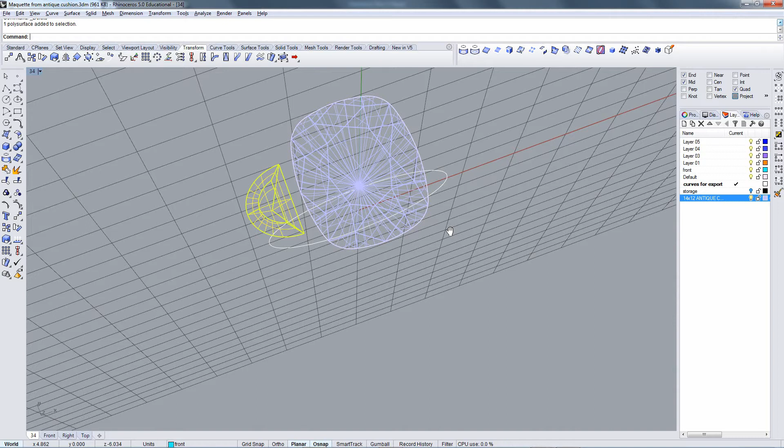I've got some commercial size stones here. I've got an antique cushion, 14 by 12, and I've got a half moon that is 6 by 3.75. Both of these are stones I can source easily. I'm working with a finger bore of 17 millimeters, which is a standard industry finger bore.

First thing I'm going to do is offset that 2 millimeters, which is a good standard shank thickness. I'm going to move it up 0.3 millimeters so that it's narrower at the bottom than at the top. You don't want to go below 1.7 normally down here, because after casting and finishing it's going to come down to close to 1.5. If you're really feeling adventurous, take it at 0.35.

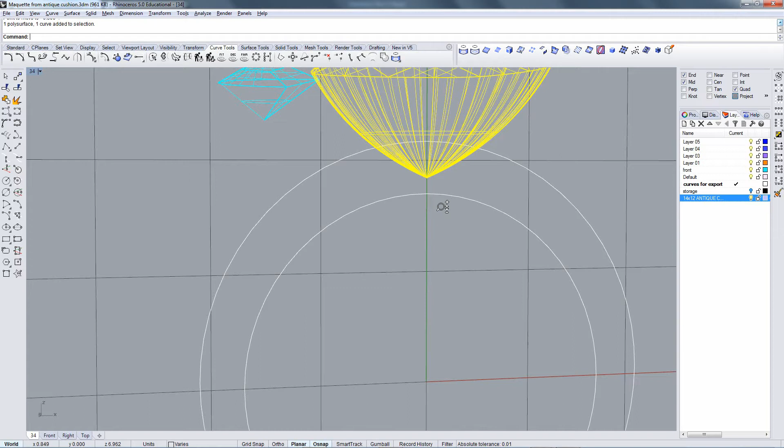Okay, so you have this. We now need to line the center stone up, so that we already have actually. We want that to be between 6 and 7/10 of a millimeter off the finger. So put it on the finger, and there you go.

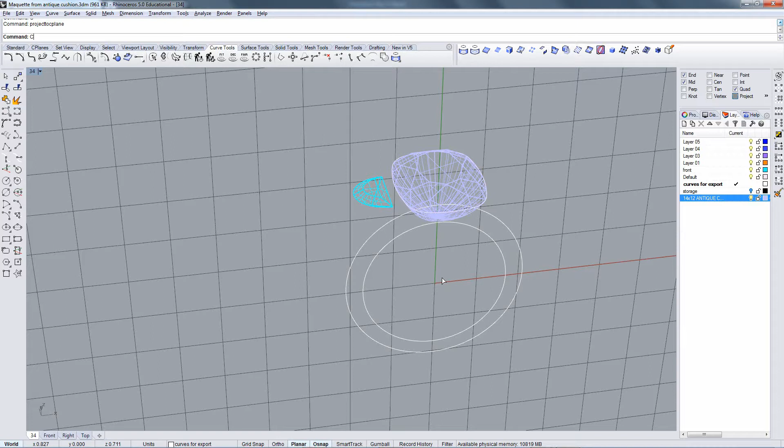Going back into top C-plane, you will see that I do that. I work in perspective view. I change C-planes all the time by keyboard shortcut. So if I hit right C-plane, it's like working in the right view. Front C-plane is like working in the front view. And you can find that by going to set C-plane and then doing it here.

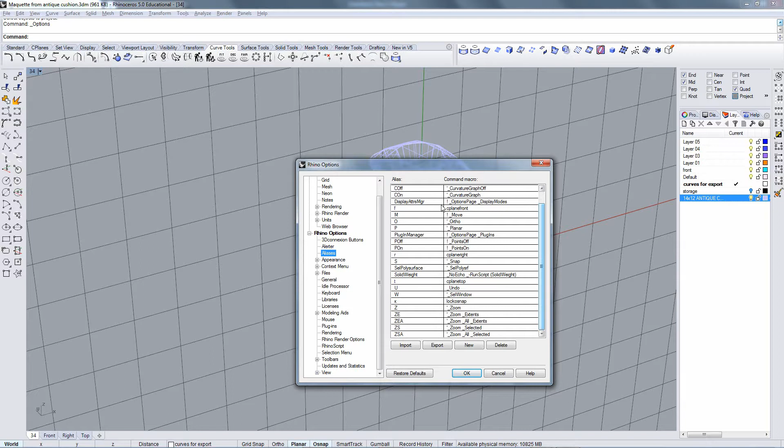But it's much easier to set a shortcut for it. The place that you do that is you come to Options, Keyboard, it's either aliases or keyboard, I always forget which one. Aliases. So go to aliases, and for me, I just use the first letter of the word: T for C-plane top, that's the actual command in Rhino. R for C-plane right, actual command in Rhino. And F for C-plane front. That way I can just type T, F, R to get my 3 standard C-planes up.

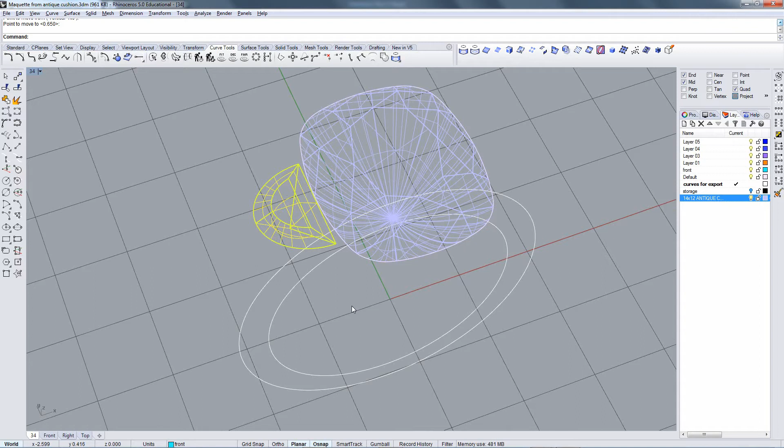So when I change C-planes, that's what's going on. The first thing I got to do is set this up to make sure that it is tucked under the center stone. I'll start with a very minimal tucking under. I'll go ahead and mirror this with history. And then the next question is elevation.

Now I did bow or swell the sides of the stone to represent what a colored stone would be more likely to look like. Usually there's a couple of ways to do this. I'll do it with curves. No, I won't, I lied to you. I'm going to use a cutting plane, because I can take a cutting plane command.

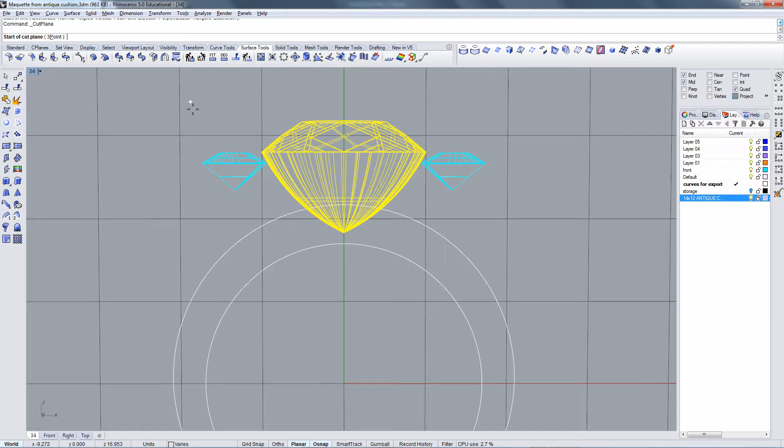I can click literally anywhere and pull it to either side holding the Shift key down, and Rhino will give me a surface that intersects, that covers the full dimensions of that object. Because I'm trying to visualize where I want my under bezel to be, it's going to be helpful to me if I have a surface that'll actually cut off my stone.

Usually you want it between 1/3 and 1/4 of the way. So I did go into my front viewport for just a minute. So 1/3 would be about there, that would be the top edge of the under bezel. That's as low as I can go. I want to look at some relationships here. I don't want to go quite that low. As high as I could go would be 1/4, which would be here. I'm going to come somewhere in between.

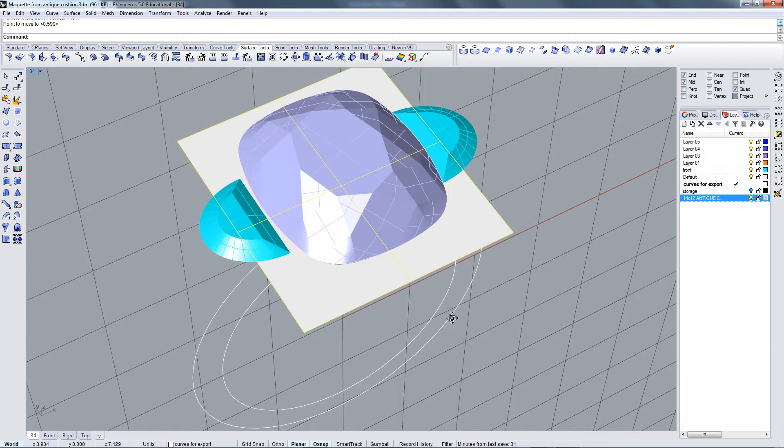Okay, so that's going to give me the elevation for my under bezel for my center stone. That's important because it's also going to impact where those under bezels take place on the side stones. As we mentioned in class, we want those to work together.

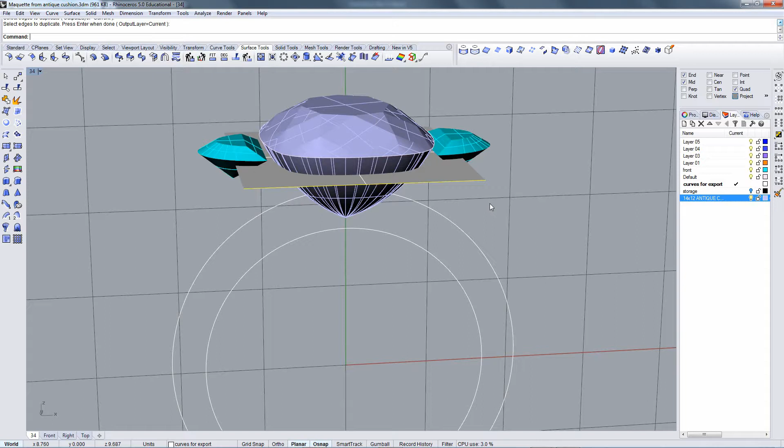Now that I have this, I don't necessarily need to have a surface anymore. So I'm just going to borrow the front edge of this and project it to CPlane. And I can throw that away. That's a quick way of getting myself a curve there. Now, as far as the under bezels for my side stones, I would like them to be contiguous with that. So I'm going to use near snap.

I can't come right up against the side of this. I need to leave a little bit of metal there, about 1 millimeter. It'd be useful to me to be able to see what that millimeter looks like.

Going to use near snap, grab that curve, do both sides line, and I'll pull myself a reference curve, which I will then offset maybe 1 millimeter. See, that's going to be way too much. The outer edge of this can't break beyond the girdle

of the stone. So I'm going to use an end snap so I can grab right at the corner here and pull it down. I don't want that corner to take place where this hinges any farther out than that. So for now, I'll put it right there.

Intersect, snap. And I'm going to pull a line that follows fairly nicely with that shoulder.

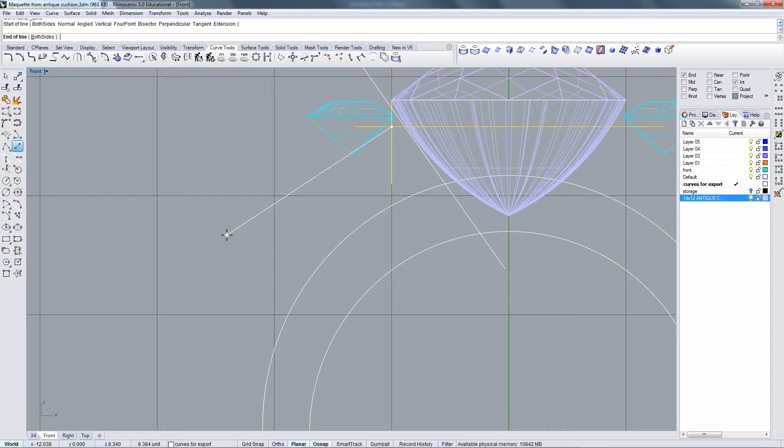The more upright I take that stone, the more flat, the bigger it's going to be, but the duller the fire is going to be, and the clunkier it's going to be as an object. Tapering it down makes the center stone much more important, but it makes the side stones almost disappear, and it really dictates the flow of the shoulder.

So I'm just going to try and go pretty much parallel visually to what that is there.

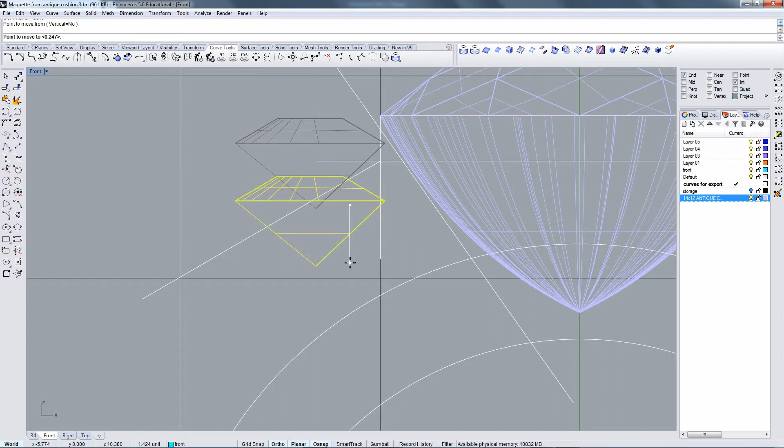I'm going to go ahead and move this stone down straight, holding the Shift key. And I'm going to picture basically where it hits the middle of the girdle of that stone. And then I'm going to rotate it.

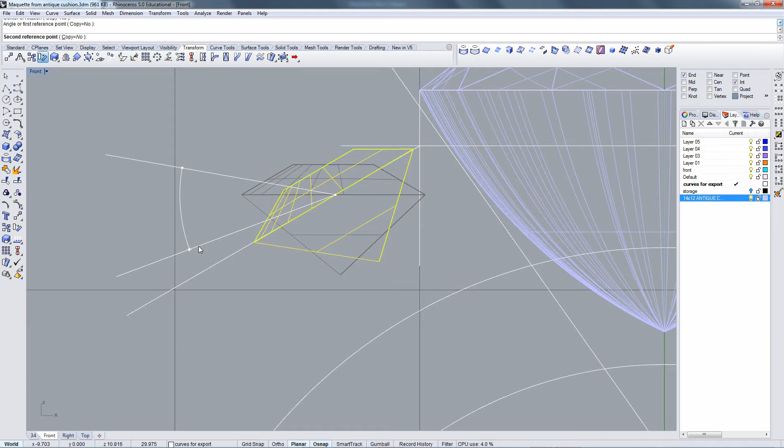And I don't like to use the gumball. That's a personal preference of mine. You can if you want to. But for me, I prefer to just come in here, grab pretty much anywhere. I'm going to rotate the stone until it seems to line up pretty well with that curve.

And then I'll move it back up. And once again, I want that line, that's going to be the top of the under bezel. I want it to be somewhere between 1/4 and 1/3.

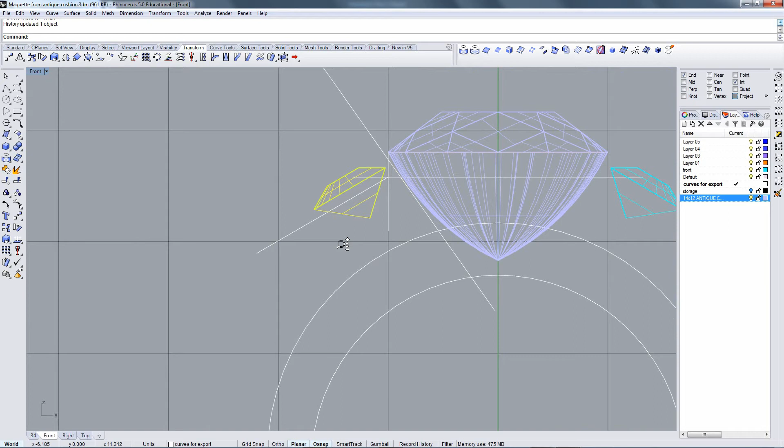That's okay, and I can actually have this snug up a little bit tighter under that stone. I have to, because actually it can't be outside of the girdle. So tuck it back under.

And you can see that if I tuck this under and I keep that angle, where this corner meets starts to become somewhat of an issue.

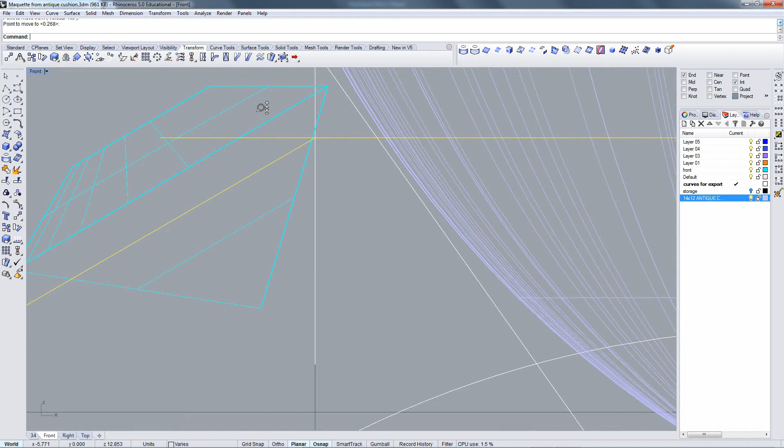Going to alleviate that in 2 ways. Going to drop the whole under bezel assembly down a little bit. And then I'm going to move the seam over a little bit.

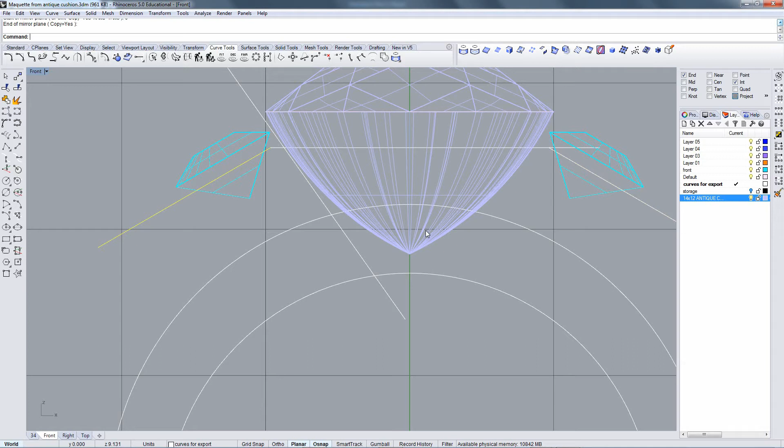And that'll give me a nice indication of where my under bezel could be. I might leave that curve, that could be useful later. So there.

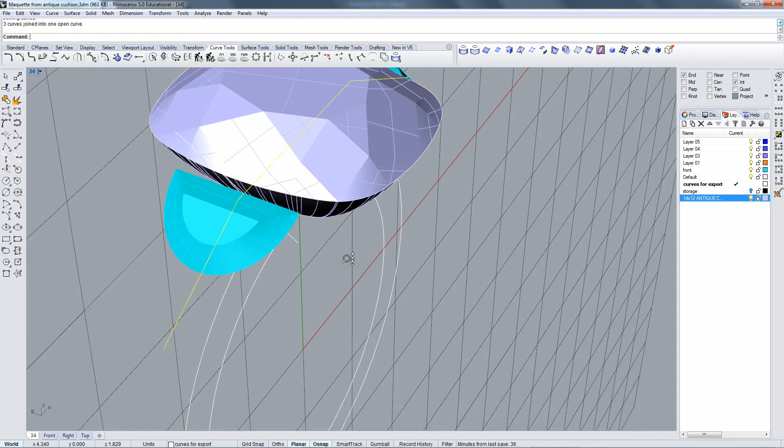I'm going to join those three together, and I'm going to extrude them straight out. Remember, extrusions are always perpendicular to the active C-plane, so to get it to extrude like so, I need the front C-plane active, which it is. Give myself plenty of room, I don't want to cut this close at all.

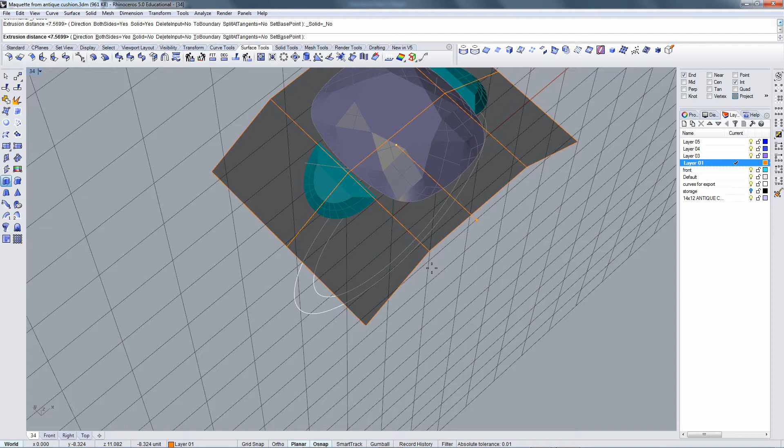So now that I have that in place, I can start to get a better sense of how that looks, and I think it's okay. I may move things around a little bit more later, but I think it's okay.

I would like to bring, I have a girdle curve here for the stone. I would like to bring that down onto this level. So I'm going to set a C-plane to this surface, and I'm going to project this curve down to the C-plane.

I will be honest with you, where project to the C-plane is, I do not know. I've been using it as a, you can type it into the command line. I have it set to the C keyboard shortcut because I use it all the time.

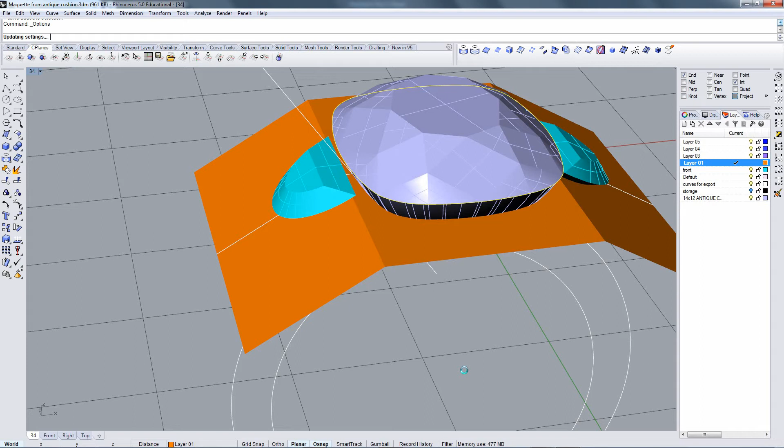I'm going to hit the no option, keep it there because I don't want to lose my original. That curve gives me an idea of what that looks like in three-dimensional space.

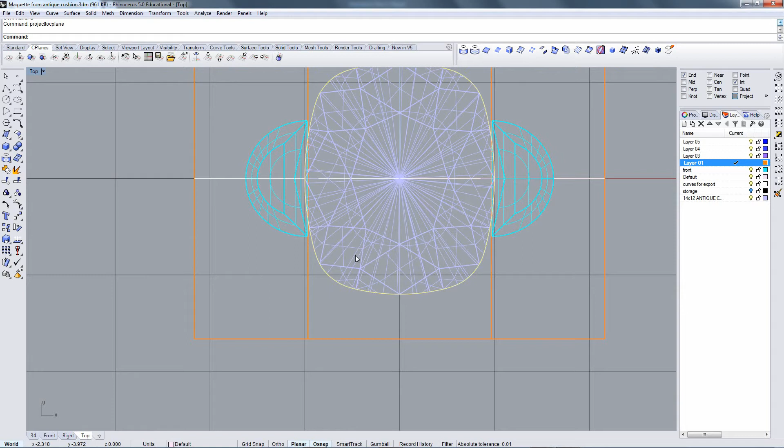I can't have the under bezel any bigger than that because that's the girdle. If I go into the top view, that is the girdle. I need it actually to be smaller than that. Not much, doesn't have to be a lot smaller, but it needs to be smaller.

I think that's realistic.

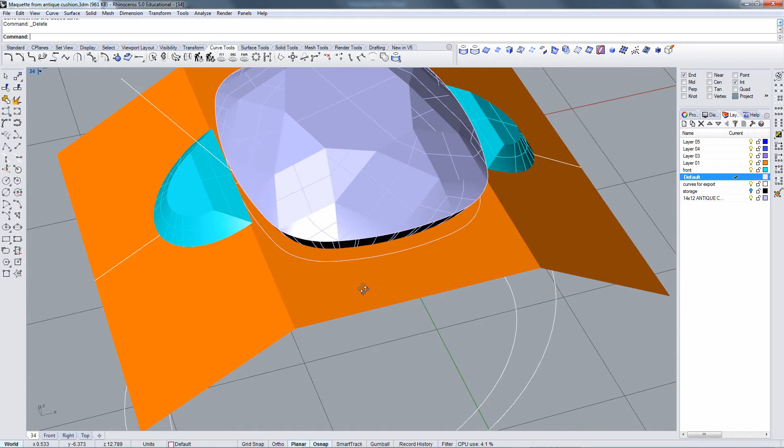Okay, I'm going to do the same thing with these stones. I don't have a pre-existing girdle curve, so I'll just make one by duplicating the border and joining those curves together.

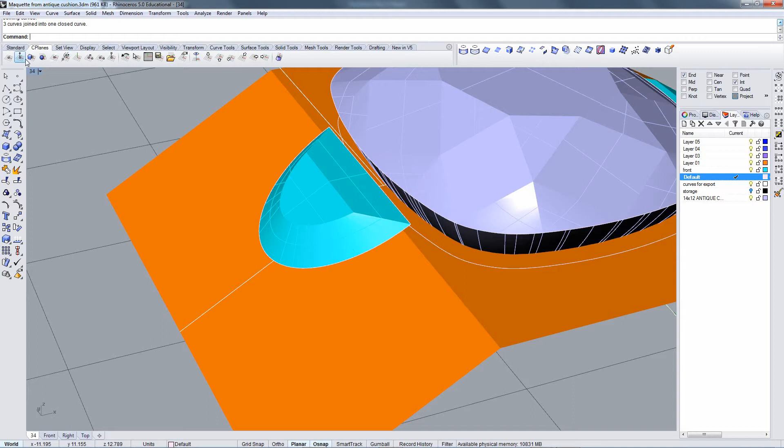And then it's the same situation. I need to set a C-plane to this surface, and that'll allow me to project this curve onto that C-plane, and then I'll be able to offset that curve just a little bit.

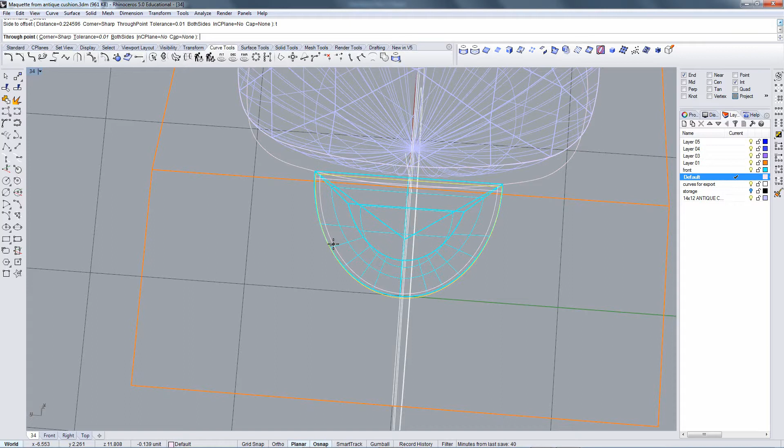I'll probably offset that a little bit less. We shall see. And then I can delete that.

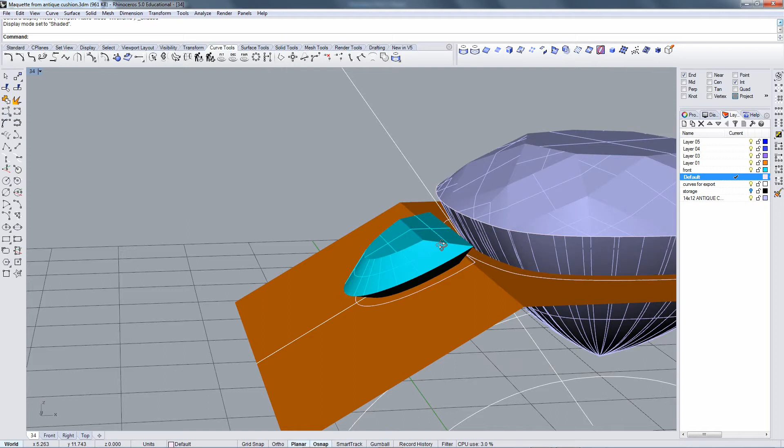And this begins to give me some sense of what I'm going to be dealing with in my plate. If I hide my stones, turn off their layers, I can start to see what's going on here.

So I'm going to put the C-plane back on top of this surface. I'm going to draw a straight line with project to C-plane turned on my snaps. I'm going to grab the end of this and pull.

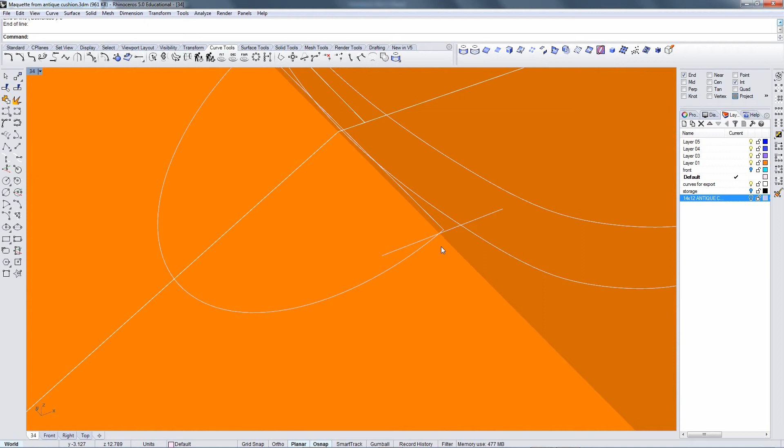Because I need to have this come up and meet this center line in some way, and there are a couple of ways I can achieve that. And I need to decide how I want to achieve that.

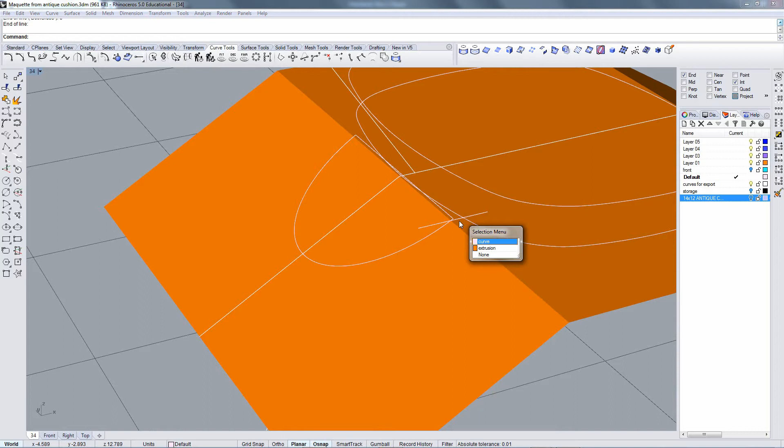But frankly, for a maquette, you know what? I'm overthinking this. It's like I'm modeling it. I'm not going to go that far. I am going to declare that this is okay. All right, so I've got this.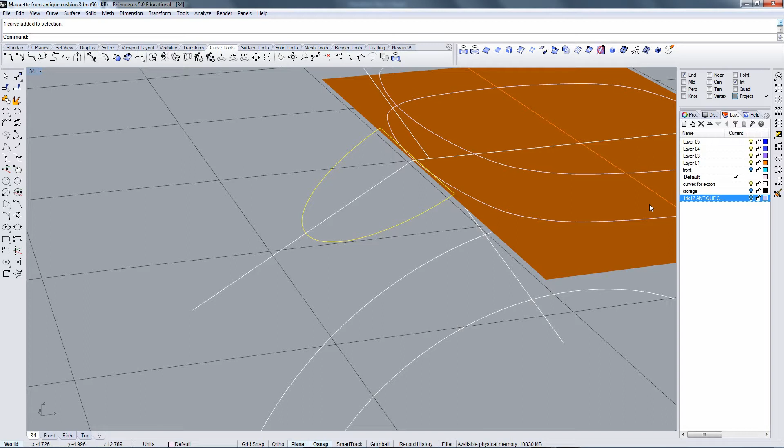I'm going to take off this surface. Extract copy equals no by right-clicking on explode. And I'll replace it with a planar surface, like so. I'll go ahead and trim that center surface.

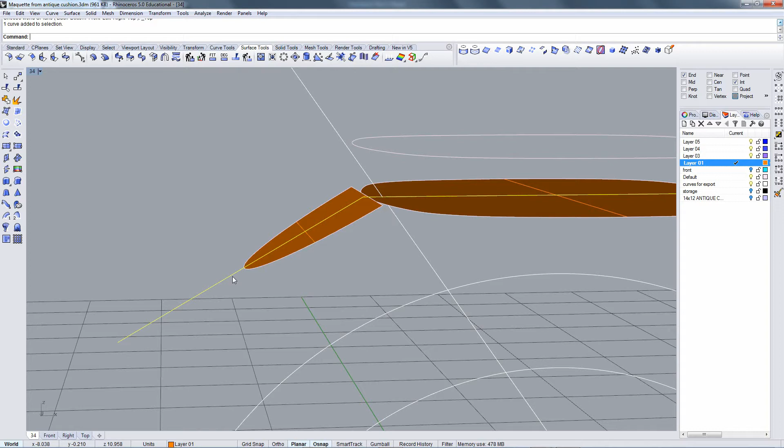And then I'm going to offset this surface the thickness that I think I want for my under bezel. Now there's a couple of ways I can do that. I could come here in the front view, turn my stones back on, and do an offset so I can visualize it. Through point,

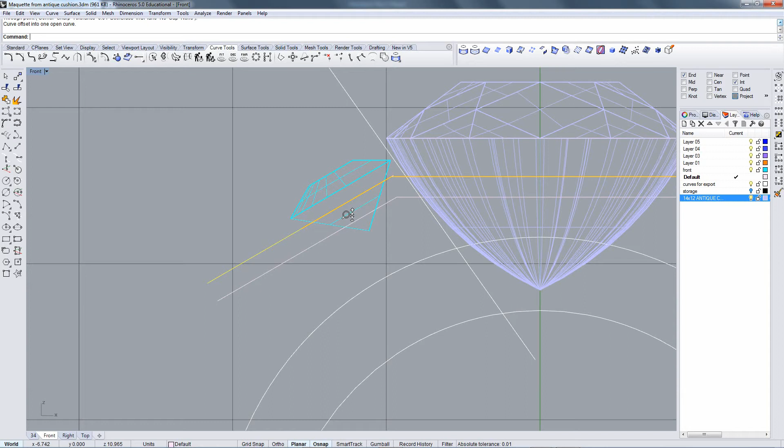and just rubber band it until I see something that I think looks good for the overall scale of this ring. Say there, okay? And then I can repeat the command and look and see what that was. That was 0.65. It's got to be heavier than that.

I can't have an under bezel that's smaller than 9/10. So let's see what 9/10 looks like. Okay, it's going to be heavier. I want it to be heavy. So I'll go with a 1 millimeter.

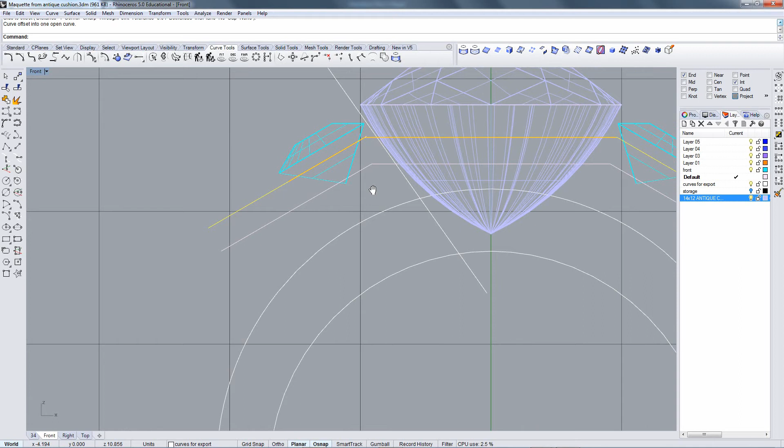Nope, too heavy, 0.95. And this is a design process. I'm looking at it. Now that I've got that distance, I can come back here, grab this surface, and I have a couple of choices.

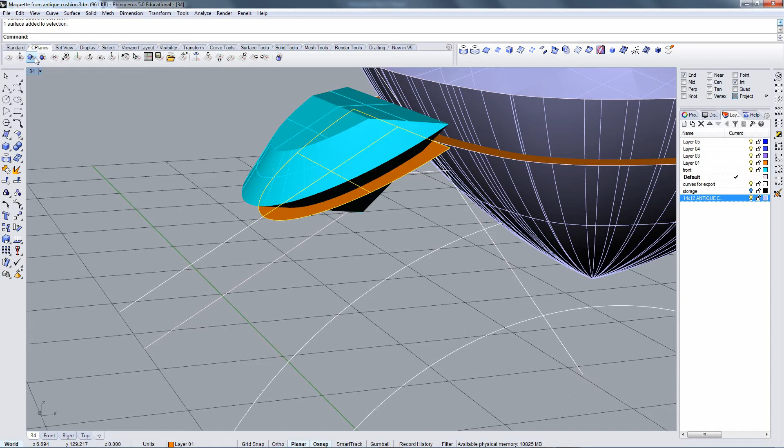I can offset surface or I can extrude it. To extrude it, I would once again set the C-plane to that surface because extrusions are always perpendicular to the C-plane. Go to solid, extrude surface straight, and I would extrude it minus 0.95.

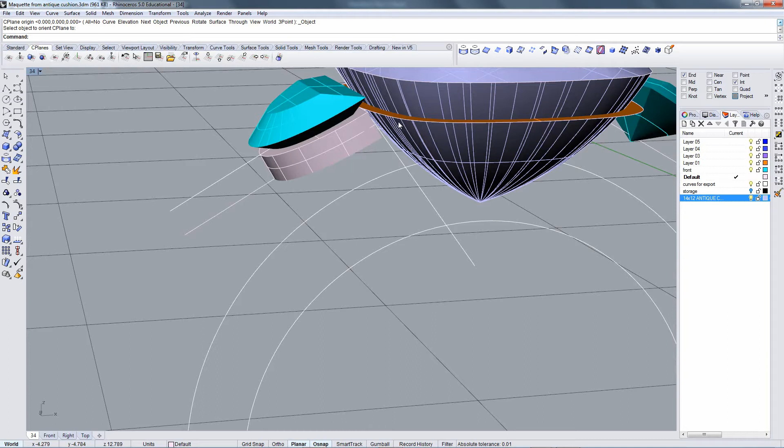Now it's going to leave that original surface behind, which I can now delete. I can do the same thing for the center. Set a C-plane here, and extrude straight, and the same distance.

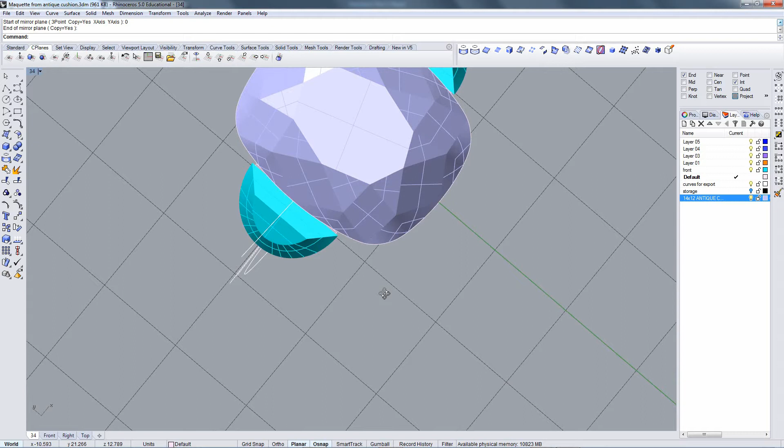And mirror that over, and that'll give me an idea of what I'm looking at for a potential under bezel for this piece.

My next question is going to be, how does that relate, going back to my top C-plane. Whenever I'm not modeling, I drop it back to top C-plane because that's the standard view.

Now that I see it, those might be too thin. But I'm not going to worry about that. It was just to give me an idea. I won't be using them anyway, to be honest with you.

So I'm going to go into my front C-plane. I'm going to now draw the front of this a little bit. Going to take a line.

And I want it to come inward. Now remember, if you look at the samples we gave you, you can have that come anywhere from into the center to like this. It can be anything you want. Generally, I like to aim somewhere halfway between the girdle, between the apex of the finger bore and the center of the bore. So I usually come somewhere like that.

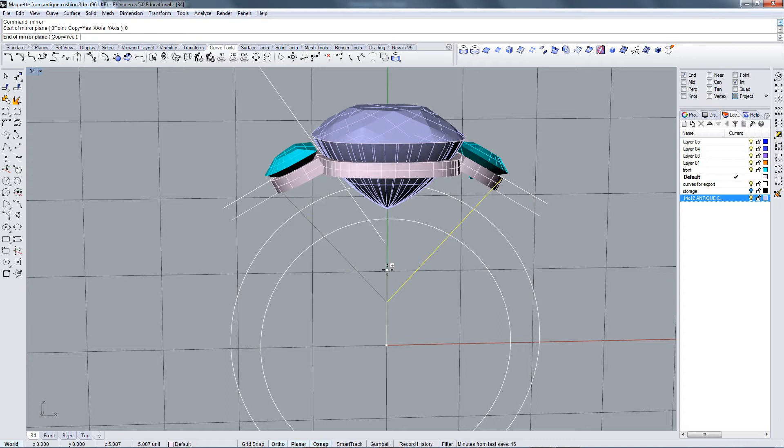Maybe a little lower, depends on how wide the head is. I'm going to splay that out just so I can get a sense of whether I like that or not. I do. That's going to be fine.

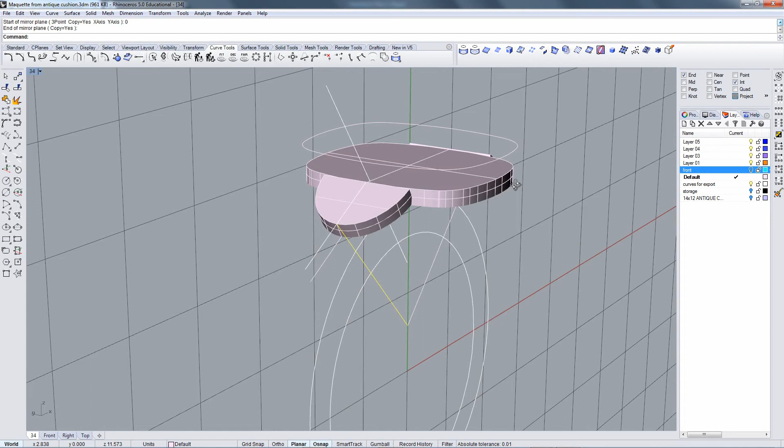So now I do run into a little bit of a challenge, because what I would like to do is just extrude that straight down and have it be what I want. That would be the easiest way to maquette or model this.

So, I still have my curves here, right?

So what I want to do is right-click to extract a surface. This time I'll say copy, yes. I have it set to the orange layer, so it'll do the same thing, but with orange.

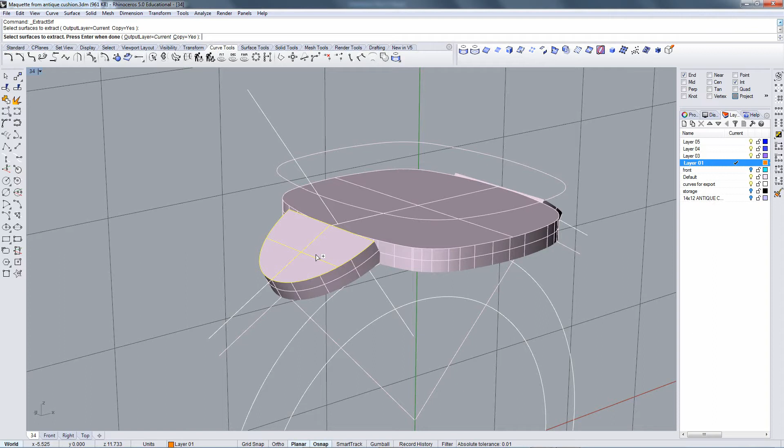Going to untrim, untrim all. I'm going to extend this surface till it intersects with that one. I'm going to use it to trim the top of that off, that way I know I have a really tight fit here.

In fact, just so I can see that, I might extract an iso curve, to catch the corner of it.

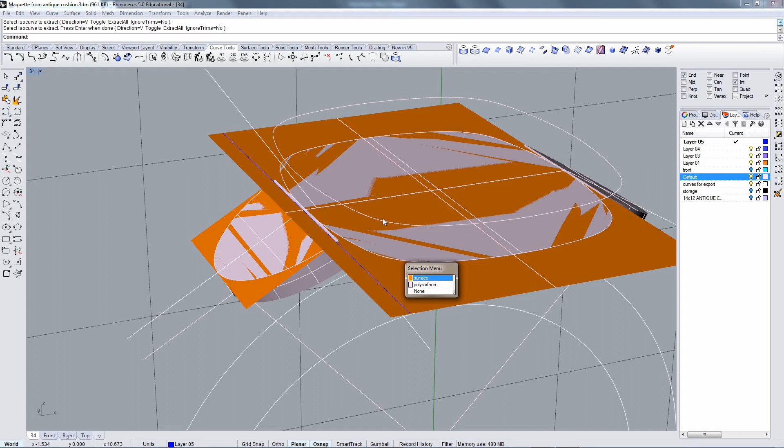I'm going to come back and look at my lines. It would be all kinds of wonderful if I still had the curve. There it is. I'm going to just change that to the blue so I can see it easier for a minute. Same with this, change layer to blue.

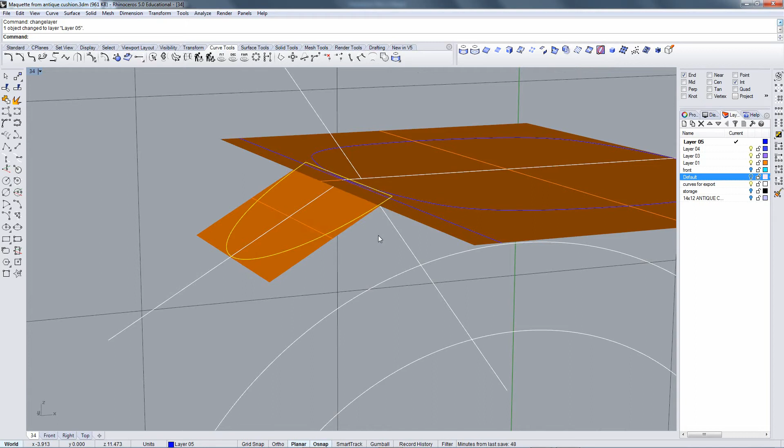Okay, so I know that this is going to work until here, and then it's not going to work. And I have a choice of what I can do with this, but what I think would be the most graceful thing to do, I'll go ahead and use that extract iso curve command again. T to toggle direction, intersect, snap to take it right here.

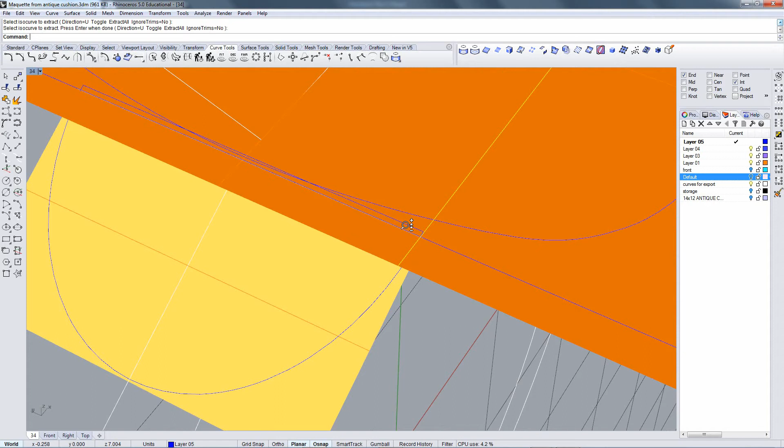Okay, I'm going to offset that. I need to be on the right C-plane to do that, so I'll set my C-plane. Top C-plane would have worked, but I may as well set it to the surface I'm working on.

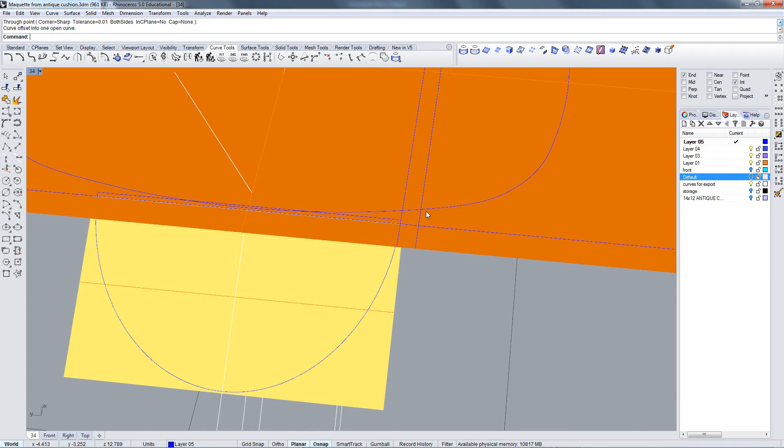I want to be able to blend these two together in a pretty way. So I'm going to come out, I think, that far. Mirror it over.

And I'm going to use that to trim. I might want this curve back at some point in time. Copy, paste, hide. Just so if I want that curve untrimmed in the future, I can find it.

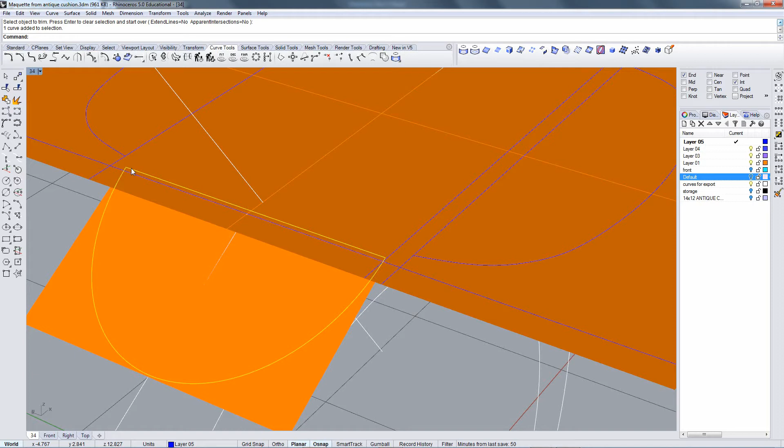So I've got that. I'm going to use this curve and trim off the back side. I also might want this someday, so hide. I can trim the back of those curves off with the surface, or I can trim it off with a curve. Doesn't matter, they're right here.

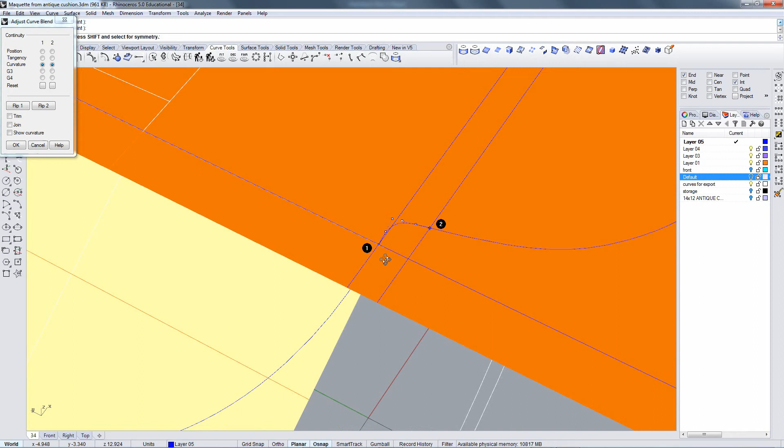Okay, and I'm going to do a blend curve. I always prefer the adjustable blend curves. It's going to give me a weird bump. I don't care. If I hold the shift key down while I drag on these control points,

I can get a symmetrical effect. I think that's nice, except for it's a bump. To make it not a bump, I can either project it onto the surface, set a C-plane, project to C-plane. It's a project either way. I'll project the surface, delete input, yes.

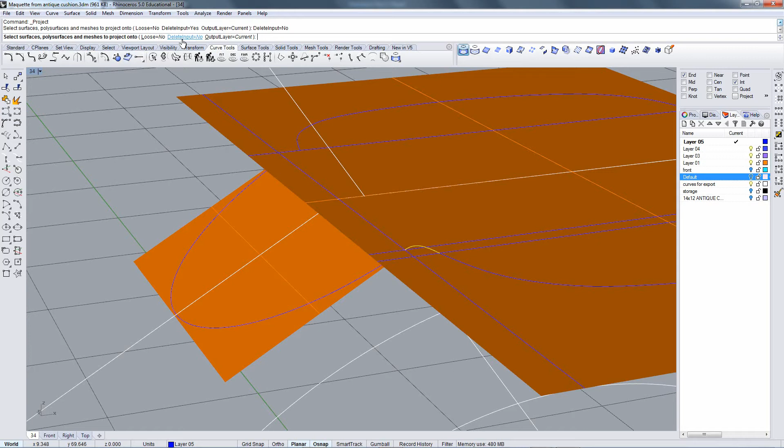There we go. Mirror it over. Mirror it over. Mirror this over.

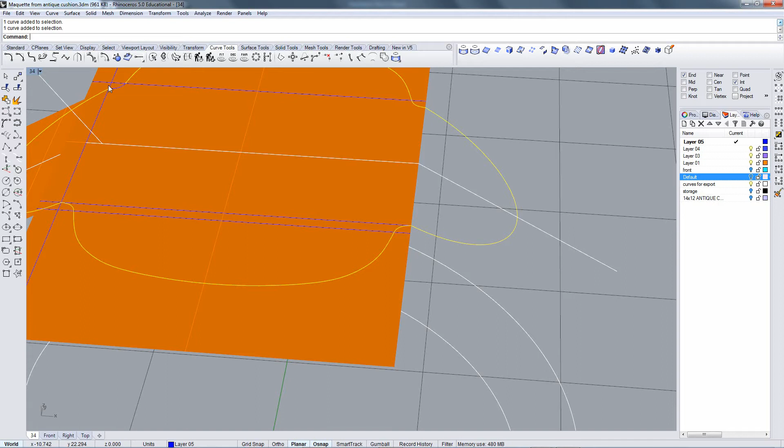And join them all together. That gives me a single curved element that I can now work with.

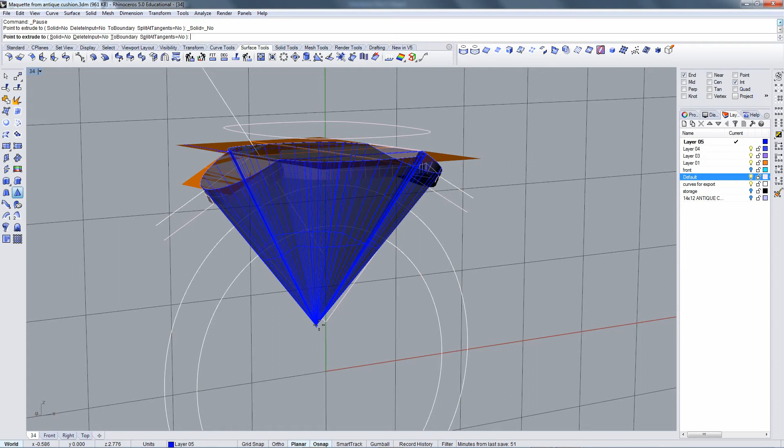I'm going to see what happens when I extrude those to a point. Frankly, that point. The main thing I want to see is how do I feel about what that's doing here at the bottom.

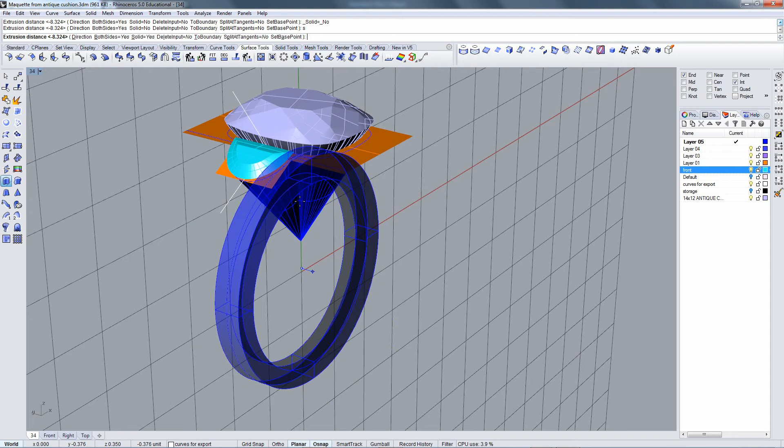And to see that more clearly, I'm going to go ahead and maquette my ring shank. It's a straight extrude, solid yes, 1 millimeter each side. Basic 2 millimeter shank. That may not be what I end up with in my design.

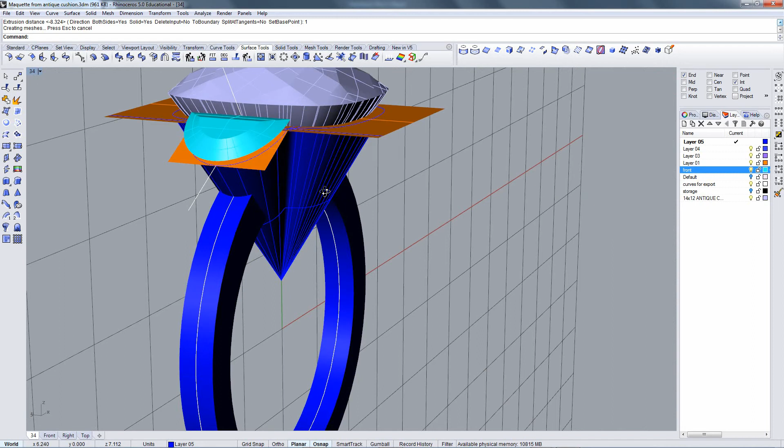But it does give me a good sense of what I'm looking at here. And the answer is not so much. I don't really love what's happening down here. So I would want to modify that some more.

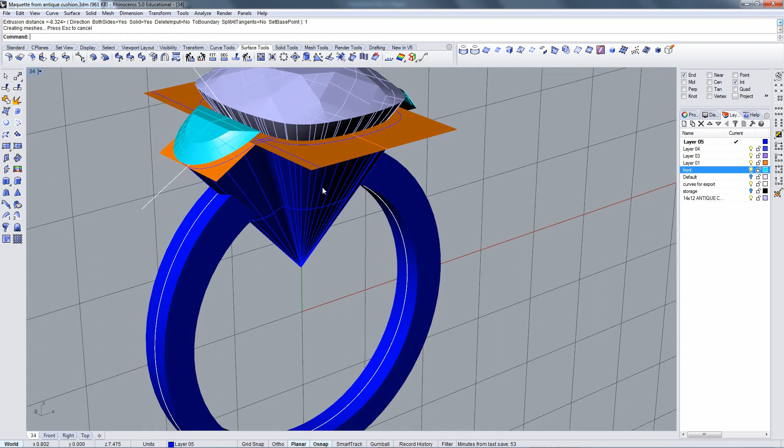And there are a couple of ways I can go about that. But I think that as a place to end, because this is going to be a long video if I don't, and that gives you some idea of how you can start thinking about maquetting this. Already you can see how that head section is looking.

I can grab that, extrude it out, and either trim it or just leave it so I visualize. Either one will work. And that starts to give me a real sense of what's happening down in here.

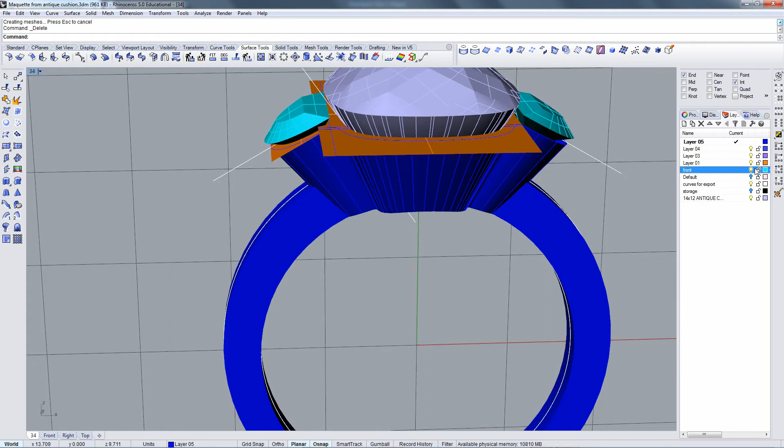I'll clean this up a little bit because it'll make it fun if I do. I'm going to take this curve that I have and do something a little destructive. I'm going to trim it, cut it in half.

Just for a minute. Trim. Oh, it won't cut it in half that way. What am I thinking? To cut it in half, I need a cutting plane.

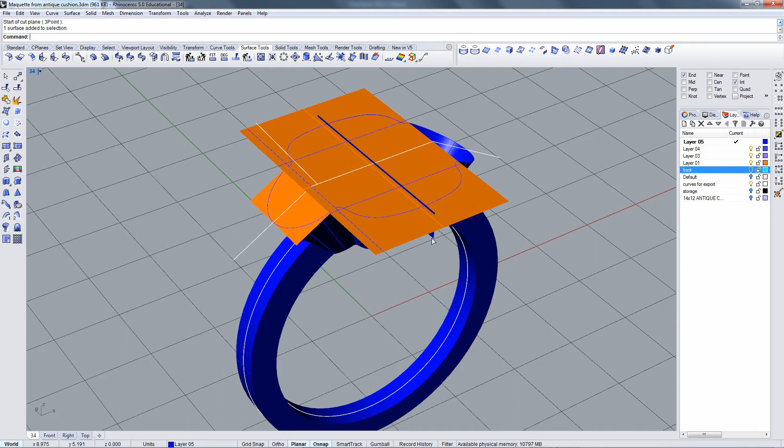Top C-plane, cutting plane at 0. Gives me a nice surface, but actually I want it going the other way. Once again, cutting plane at 0, going side to side. Now I can use that surface to cut this in half.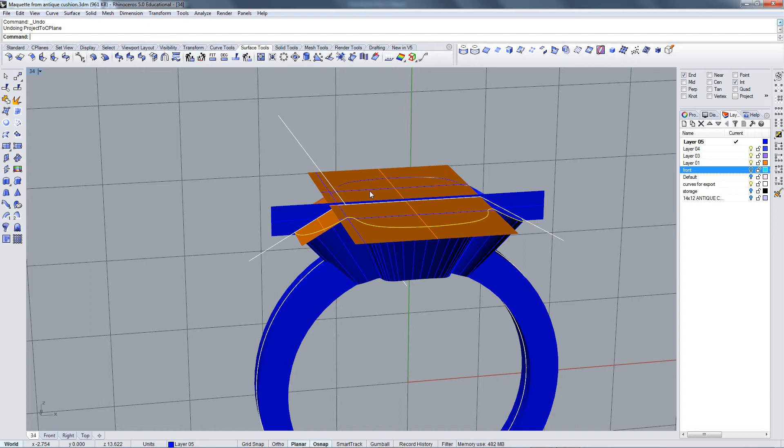Take this curve, front C-plane, project to C-plane, delete the original, copy to clipboard. That takes it out of Rhino. So I can undo without hurting anything, paste that back in, and now I have a nice curve that I can use to extrude straight.

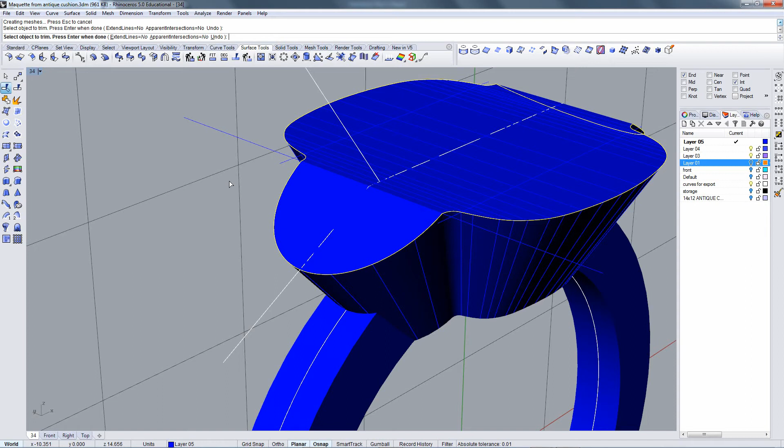I can take this curve and trim the rest of it off, which will allow me to close that up should I want to do so. More importantly, having done that gives me a curve to offset.

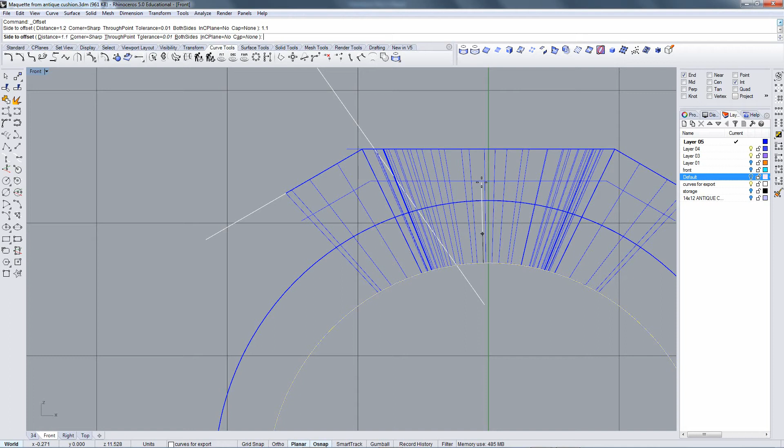I had realized that the 1 millimeter looked too thin to me. I'm going to go 1.2 because what I had here looked a little too delicate. Your typical finger rest is about 1 millimeter, can be thicker. I'm going to go 1.1... actually it could go as thin as .9, so what I'm going to do is go 1.

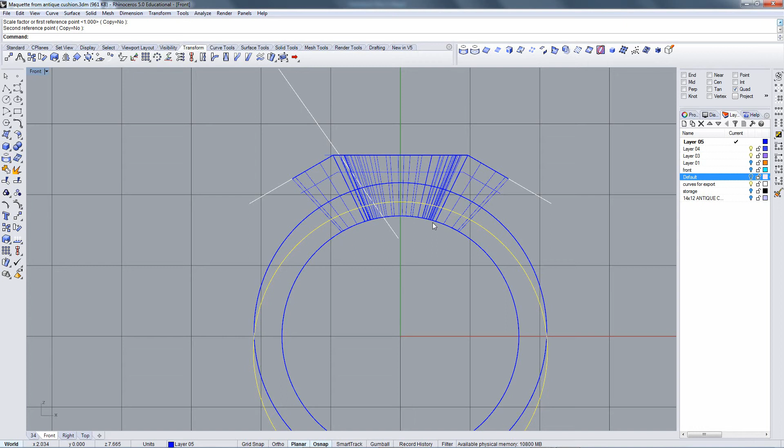And then I'm going to scale that curve up. The reason I'm doing it from its quad is so the finger rest can be narrower in the middle, thinner here, and a little thicker at the sides, because that's often structurally a nice thing to do. I'm doing a maquette so it doesn't matter a lot, but it doesn't take any extra effort, so why not?

So I have this. Probably the easiest thing — and I've been drawing all this in blue, which is really dumb because I can't see it if I change my colors. I'll put it on any other layer, doesn't matter.

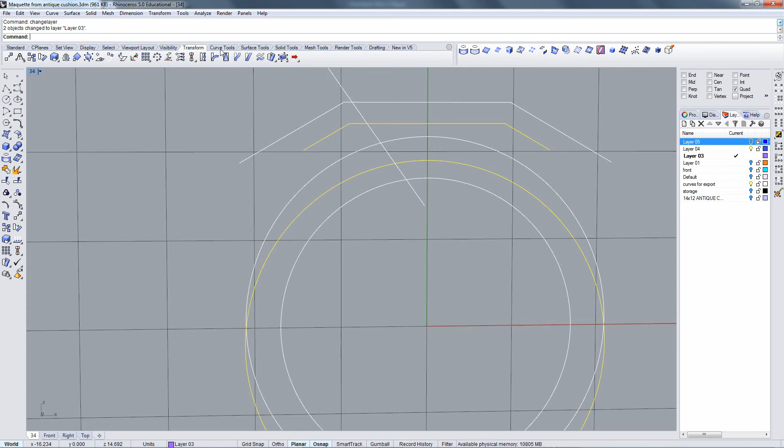I want this to cut out the center of that block. So I'm just going to draw a straight line segment. Angle doesn't matter much.

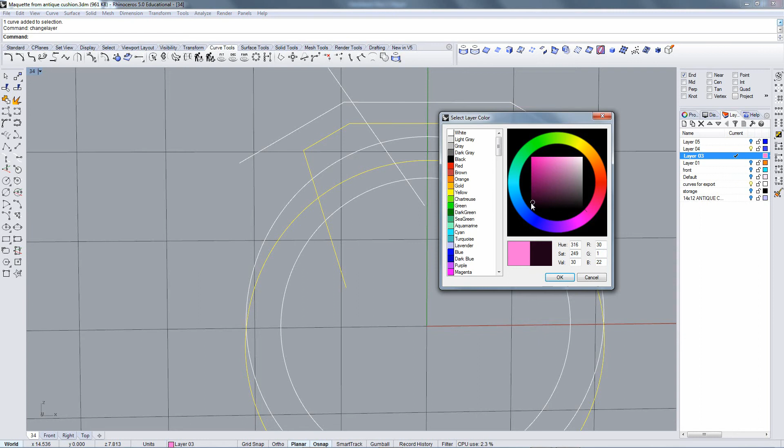Sorry that that's not a really visible color. Hopefully that is not any better. All right, let's go darker. Nice and dark — that'll be visible.

Okay, I'm going to trim the outside of this. When I join this together, I should have a closed curve, which I do. Bring back my initial maquette.

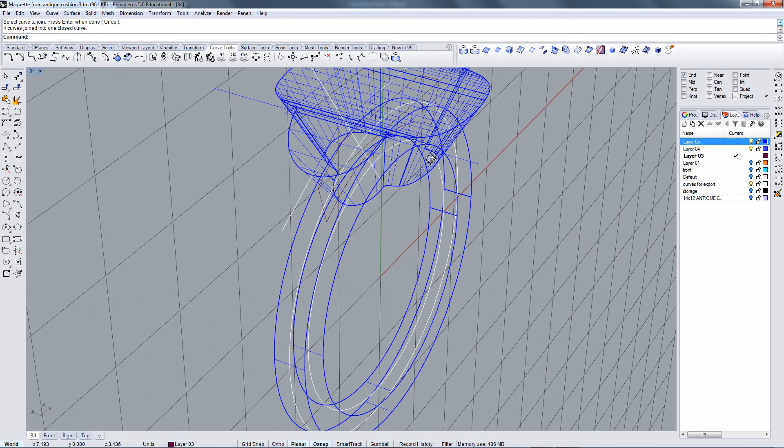Extrude this out. S for solid equals yes. Okay, so I've got this item.

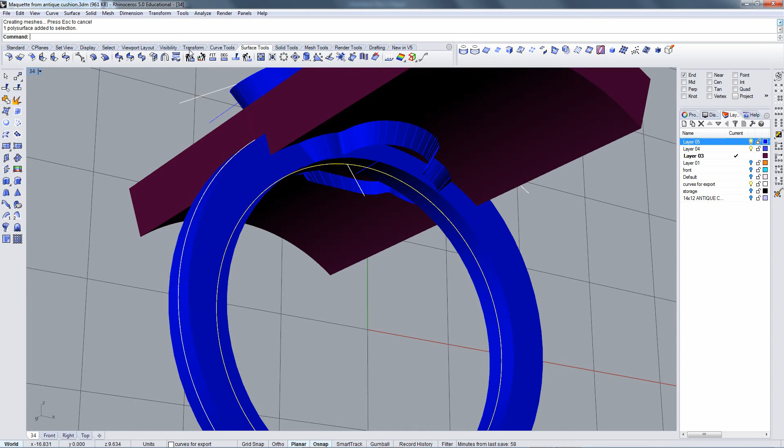Now, it's not going to want to give me a nice Boolean unless I close the bottom, so I'll do that quickly — takes a second, just grab that. Grab my maquette of the center of the head and trim. Oops, trim the wrong thing. And trim.

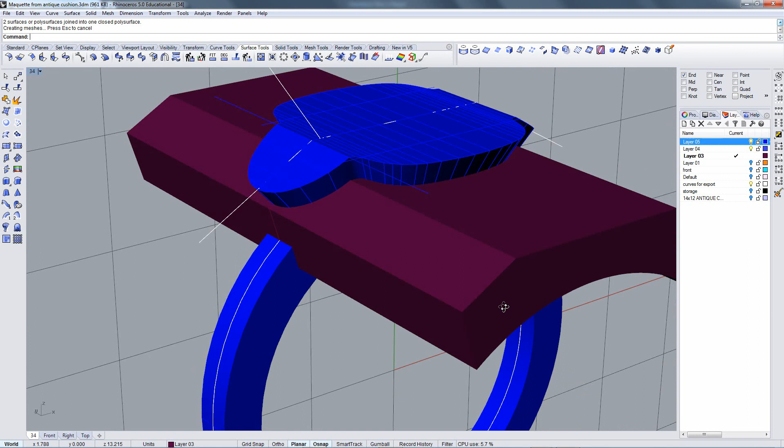I should be able to now join those together like so. And to be clear, these are not connected in any way — three pieces there. Going to do a Boolean difference.

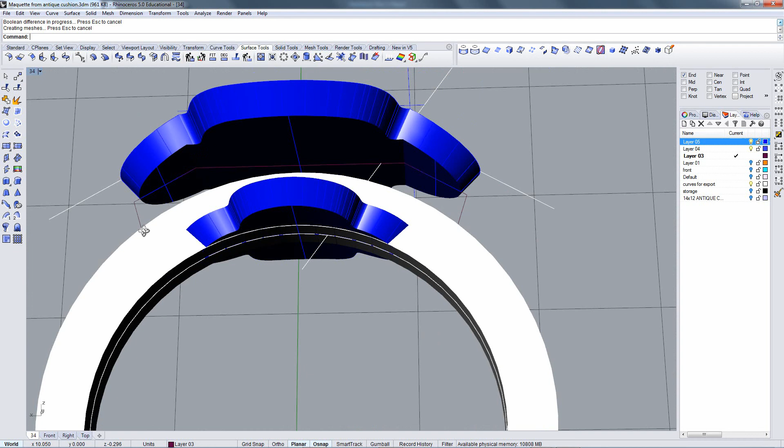And that'll give me a starting point. Now, just for hygiene, guys, when you're modeling, before I do that ever, I'll take both of these items, Control-C, Control-V, copy-paste, Control-G, group them together, Control-D, change layer, and put them in storage, so I've always got a copy of that step before I Booleaned it, because unbooleaning things is not easy to do — it's impossible.

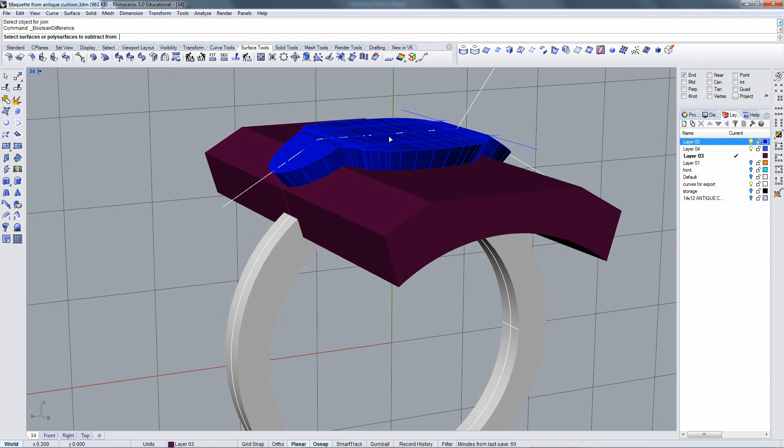There you go. Okay, so on our ring we can see our shank is thicker here. It won't be in the finished piece, of course, and we may change angles — we may change many things, we will change many things. The designer would. But with that much in place...

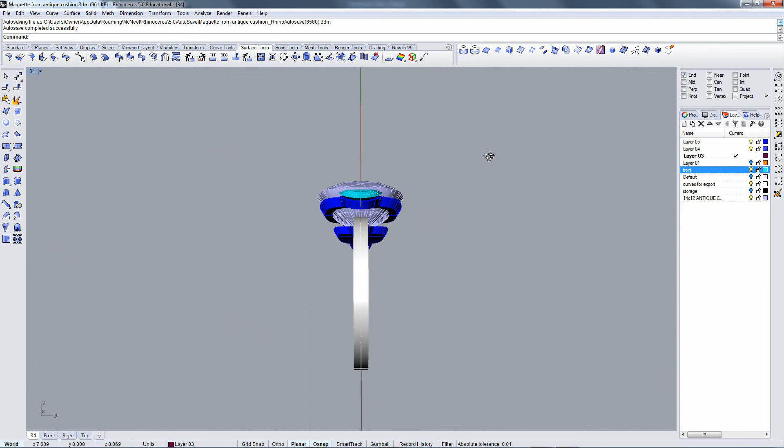You can start thinking about prongs, relative thicknesses, angles, how open or closed is this, and you can take this information into Photoshop and draw on it, or sketch more here in Rhino. And that's where I'm going to end this for now. Thanks for watching.